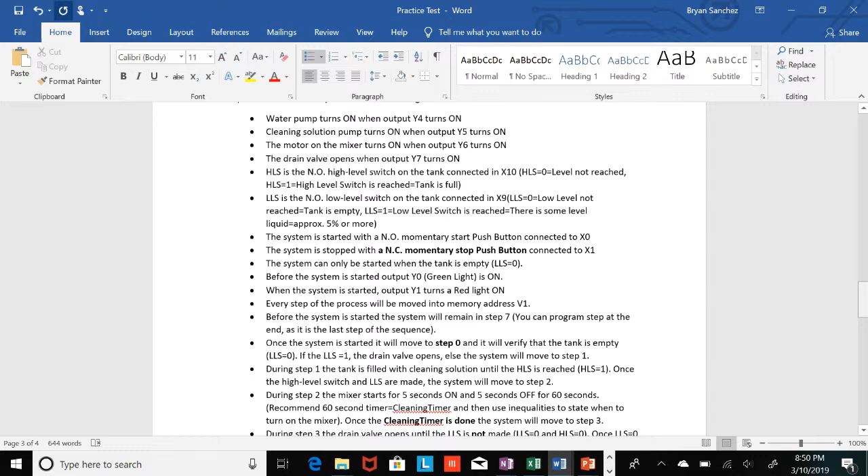And time on delay is the same thing, and making edits online. You definitely must see this one, so you don't take that long making this project. All right. So let's go over some of the specifications. Before that, we can even cover some of the details.

So we have a tank with a high level switch and a low level switch. When the low level switch is made, it means this float is floating and it's aligned with the switch itself. Right now, it's looking downwards, right? So it's throwing a zero. I made it normally open. So if it's looking downwards like this, it's not floating in water or on the solution. It's a zero. It means empty.

If it starts floating and it's aligned with the switch itself, then you have low level water. Same thing for the high level switch. If it's not floating, it's looking downwards, you have a zero. Once the water reaches a certain level, this little float starts floating, you're going to get a 1 because the switch is going to be aligned and the tank is full. All right.

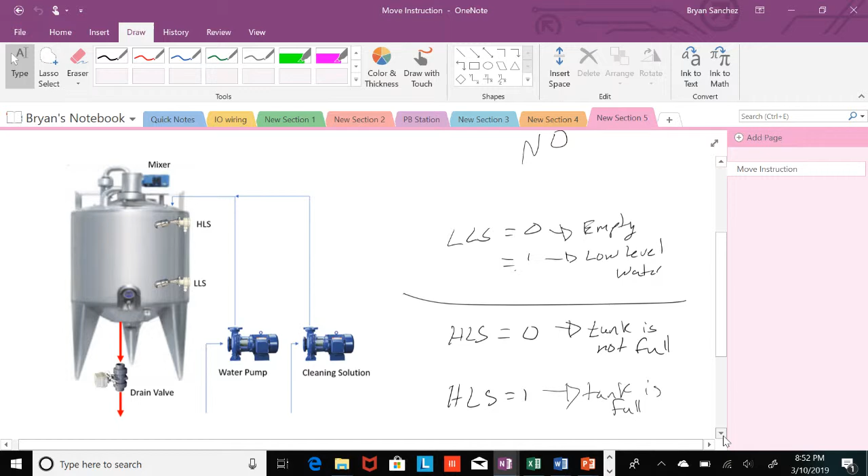You're also going to have a mixer, a motor for a mixer. It's going to turn on the mixer to clean the walls of the tank. Two pumps, one with a cleaning solution, one with the water, and a drain valve which drains the entire tank. All right. Let's go over some of the specifications now.

So the water pump will be wired and programmed to output Y4. The clean solution pump will be wired and programmed to output Y5. The motor for the mixer is going to be wired and programmed to Y6. The drain valve opens when output Y7 turns on, so it needs to be programmed and wired to Y7.

The high level switch is normally open. All right. And it's connected to X10. So when X10 is 0, the level has not been reached. When X10 is 1, the high level switch is reached, meaning the tank is full. So going back to our little drawing here, same thing I explained just a few seconds ago.

When the high level is reached, the float is going to be floating with the water. It's going to be aligned with the switch. Instead of looking downwards like it is right now, it's going to be aligned with the switch. It's going to throw a 1, meaning the tank is full. Okay.

So going back to this, then you have a low level switch, normally open, connected to X9. Meaning if the low level switch is 0, meaning X9 equals 0, the low level has not been reached. The tank is fully empty. Going back to our drawing. So this little switch is looking downwards, it's throwing a 0, meaning the tank is empty.

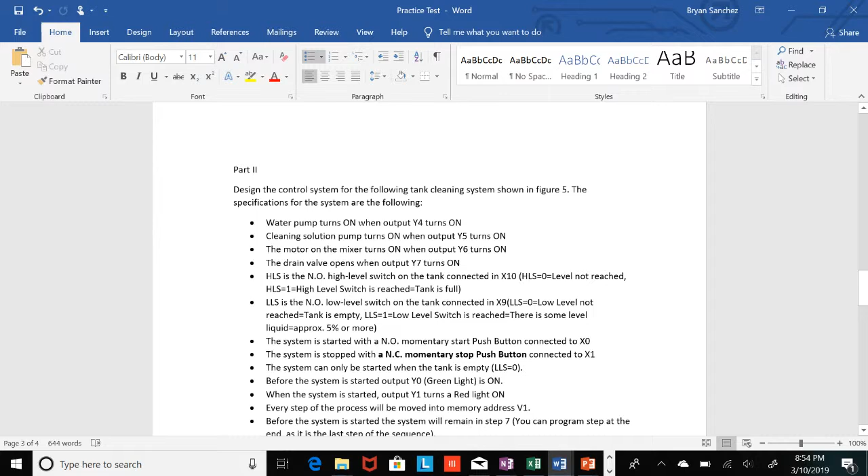The system is started with a normally open momentary start push button connected to X0. The system is stopped with a normally closed momentary stop push button connected to X1. The system can only be started when the tank is empty. If not, it's going to remain at step 0, and we're going to discuss that pretty soon.

Before the system is started, the output Y0, a green light, is on. This is before the system is started: Y0 will be on, meaning the green light. Once the system is started, the output Y1 turns on, a red light is on, meaning we're undergoing cleaning.

All right. Every step of the process will be moved into a memory location, V1 address. So we're going to use that V1 to see the steps that the system is going through.

Before the system is started, the system will remain in step 7. You can program this step at the end as it is the last step in the sequence. So I'm already telling you, program it at the end since it is the last step of the sequence.

Once the system is started, it will move to step 0. Note that step 0 is not an actual step, it's just a verification. That's why I call it step 0. It will verify that the tank is empty: low level switch equals 0. If the low level switch is 1, the drain valve... first of all, you have to understand what the low level switch equals 1 means.

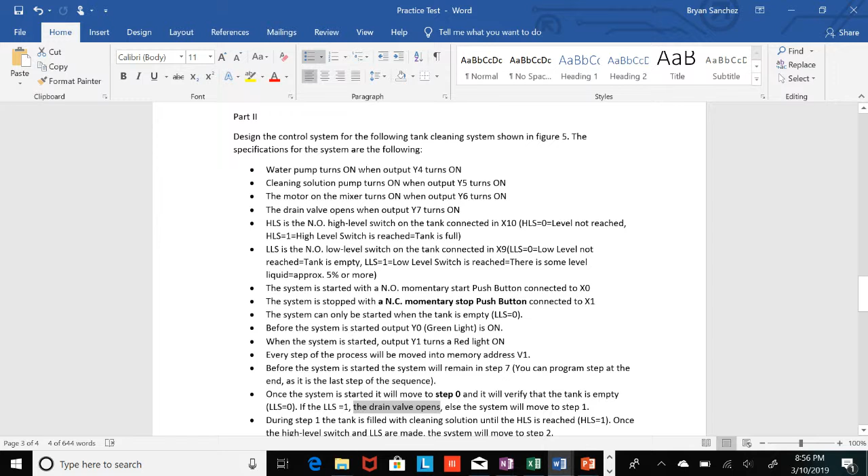So if you go back here to the low level switch, when the low level switch is 1, the low level switch is reached. There's some level of liquid in the tank, right? So since there's some level of liquid in the tank, the drain valve opens until the low level switch reaches 0. Else, we will move to step 1. So the system would say, "Hey, I'm empty already, so I'm moving to step 1."

I can add it here until the low level equals 0. Use the normally closed contact to evaluate this. All right. Actually, I'm not even going to code it. You can use whatever you want. The drain valve opens until the LLS=0 is there. So don't use it. Actually, you should use a normally open contact for evaluating that it's there.

You open the drain valve. Once this turns off, which means you have reached a low level switch of no level in the tank, then your drain valve closes. And I can show you that. I can put it right here. It's going to be very repetitive, I mean, copying the instructions. Once the low level switch...

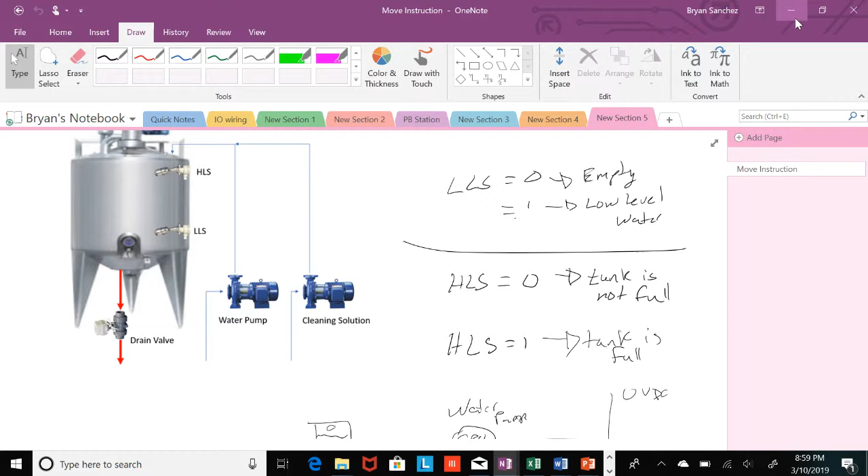During step 1, the tank is filled with the cleaning solution. So if you go to the drawing, just imagine: I'm in step 1, I start pumping cleaning solution. The tank starts filling, and you want to stop filling when? Just use common sense for this, right? Once your high level switch is made, I want to stop my cleaning solution pump from pumping, right? So you want to turn it off. So filling with the cleaning solution until the high level switch is reached.

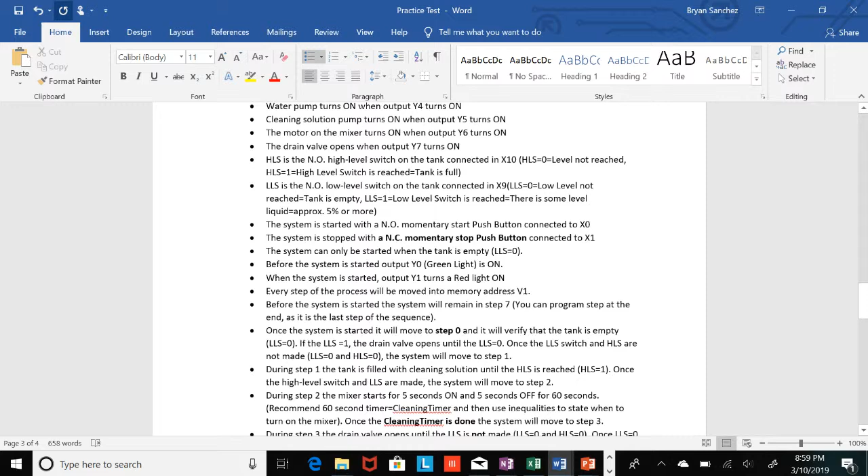Once the high level switch and the low level switch are made, the system will move automatically to step 2. During step 2, the mixer runs 5 seconds on, 5 seconds off for 60 seconds. We're going to call this timer, which is going to be a 60-second timer, a cleaning timer. Then use inequalities to state when to turn on the mixer. Once the cleaning timer is done, the system will move to step 3.

During step 3, the drain valve opens until the low level switch is not made. Okay? Once the low level switch equals 0 and the high level switch... look, this is different, right? So this is opening the valve. This is the condition to open the valve. It says the drain valve opens until the low level switch is not made. And I'm going to show you this on the program.

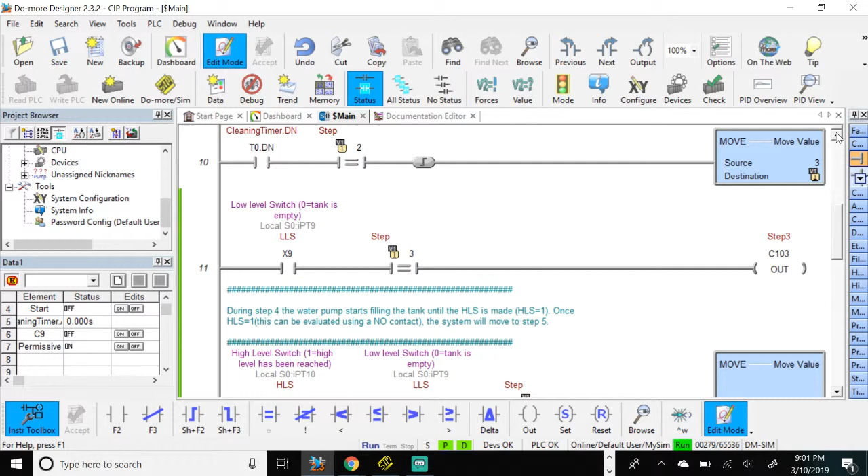Okay. Which step is this? Step 3. So I'm in step 3, right? And move 3 to location V1. And this is the pointer right here. When V1 equals 3, you could program this just like that. V1 equals 3, all right? And my low level switch is 1. I'm going to execute step 3.

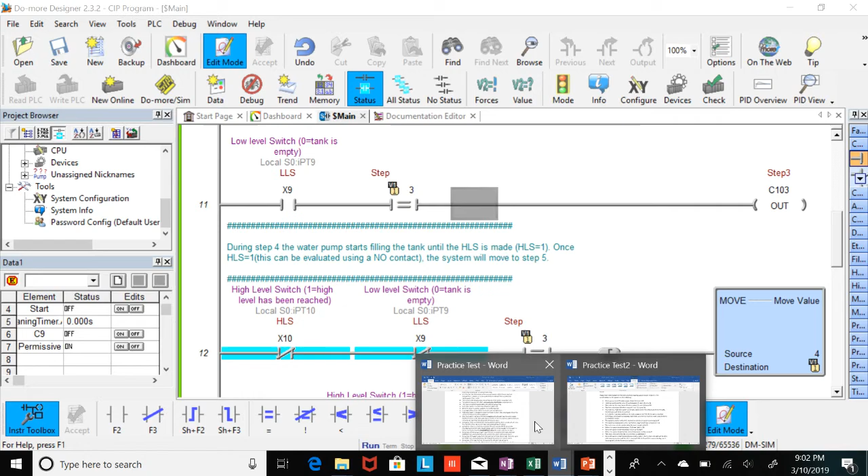And what is step 3? If I go down further, step 3, drain valves. So the drain valve is open in step 0, step 3, and step 6. So look at this. Look what it says here and compare it with the specifications. In fact, I'm going to copy the whole thing.

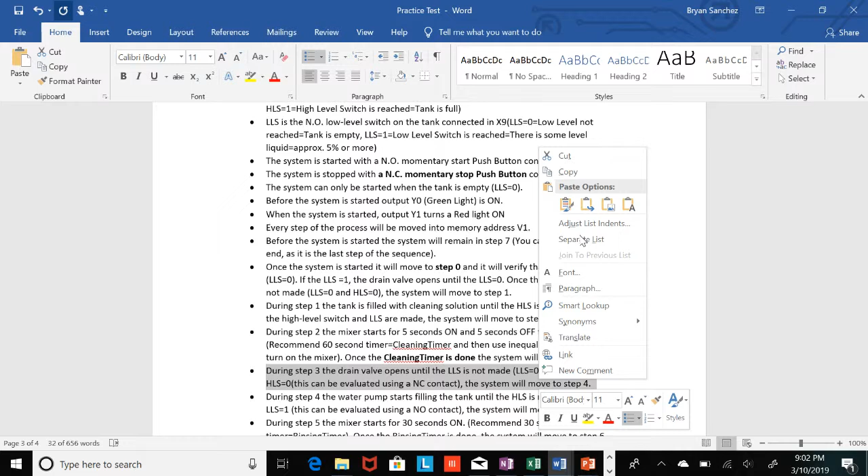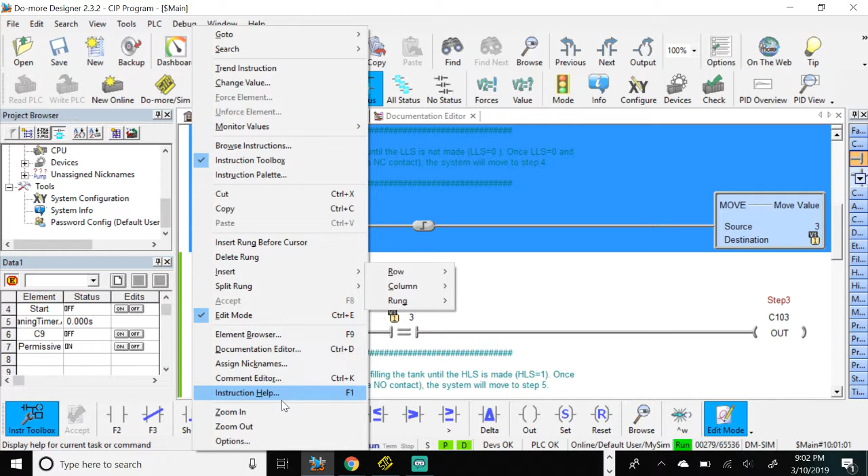Step 4. So in order to see these comments like I put, you can click on the rung that you want to put the comment on. And then you're going to insert, actually not insert, comment editor. I want to add it right here.

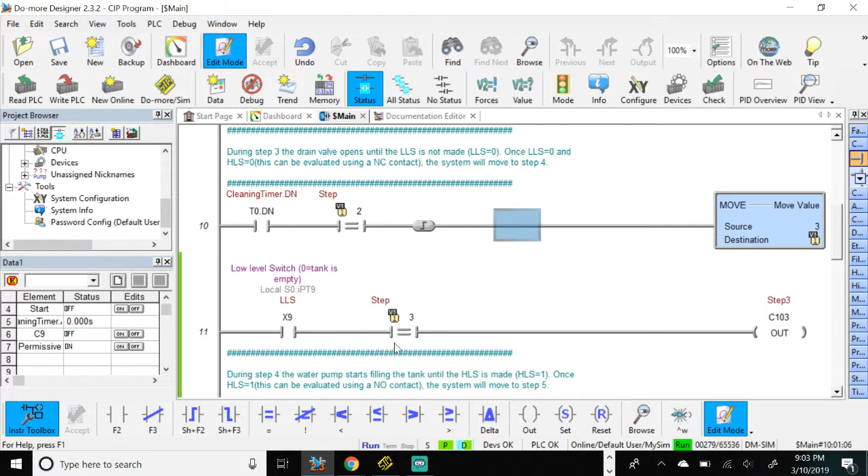I said okay. During step 3, so basically this opens the drain valve, right? During step 3, the drain valve opens until the low level switch is not made. Low level switch equals 0. So this opens the drain valve. So while this is 1, it's going to open, all right? Once this becomes 0, during step 3, it's going to put a 0 to the drain valve, shutting off the drain valve, which says until the low level switch is not made equals 0, right?

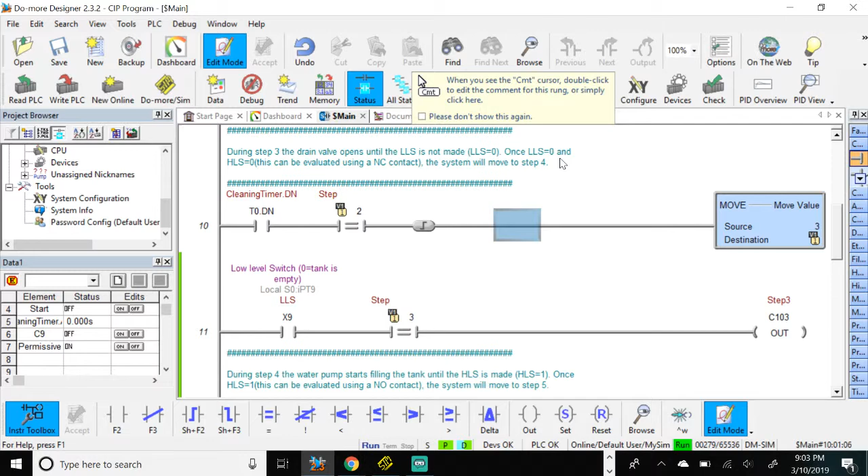So how can I evaluate that? Normally open, while it's 1, it's going to open the drain valve. When it goes back to 0, then I stop draining, right? Then it says once the low level switch equals 0 and the high level switch equals 0, the system can move to step 4. Then this part of the sentence is not here. It's going to be right here. So once the high level switch and the low level switch are not made during step 3, I'm going to use this one shot that goes from off to on.

When this whole rung goes from false to true, at that instant, meaning from off to on, I'm going to move a 4 into V1, which right now you have a 1, but initially you had a 3. And this is during step 3 only, right? You want to make sure this is on each and every step. What step were you in and what step you're going to move to. So you're going to add this little instruction right here.

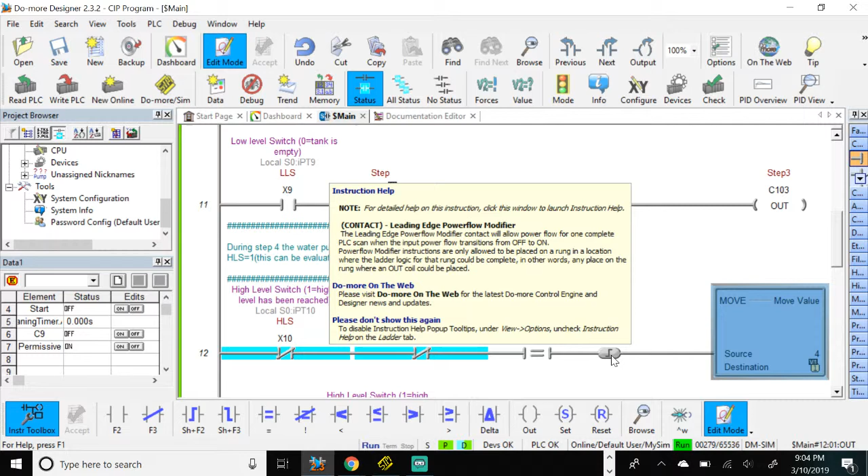So if I take this off and I move a 4, this is going to be always true. If you watched the previous video, you know that this only turns on for one scan time. That means milliseconds. We already discussed this part, right? So it's going to pulse, I'm going to throw a little pulse for a millisecond range where it's going to put a 4 into V1. If it wasn't for this, you're going to have a 4 there permanently.

And then when you go to the next step, when this switch and this switch is made, and I'm taking this off too, I'm going to move a 5. But you already have a 4 over there. So is it 4 or is it 5? This is why you need to add this little instruction here. You need to add this. It will not work if you don't add this instruction here.

Another thing you can do is, instead of this, you can put one-shot contacts on here. I do not recommend that right now, because if the level starts bouncing around on the tank, then it might cause some issues. I would use this. So when this whole rung goes from false to true, obviously your high level is going to go first, right? Then you keep draining, you keep draining. Then you reach a very low level. Then this one's going to go false, right? Since it's normally closed, it becomes true.

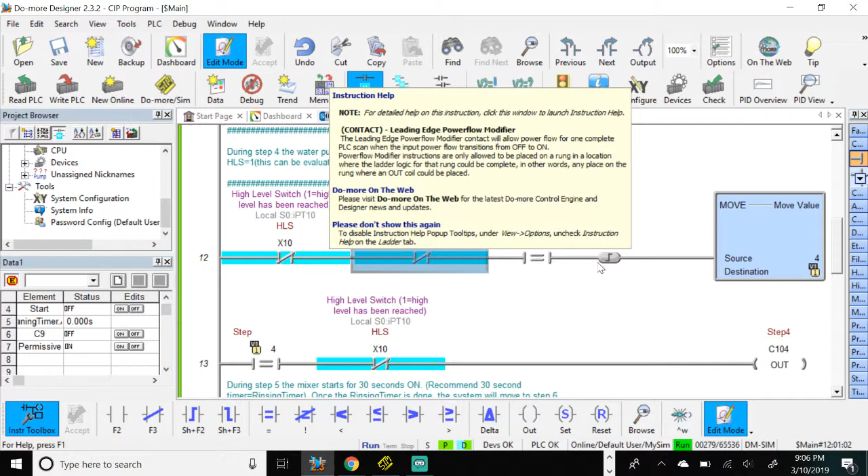So you say during step 3, now I know that my tank is drained. So it goes from false to true, throws a little pulse, it moves the 4 into V1. Now, it's not constantly true. It's not moving the 4 every scan time. It just moves it for one scan time, moves a 4 to V1. So now you got a 4 here.

Now when this happens, this becomes true. All right. Now I'm no longer moving a 4. I already have a 4 in there. So now it's gonna do the same thing. It's gonna move a 5 for one scan time. And with this instruction, once you move it, it's there permanently until you move something else to it. So it moves a 5 to V1.

You can experiment with this on your own as well. You can try it on your own. And there's a video on it as well. All right. So you want to put this instruction before it. Okay.

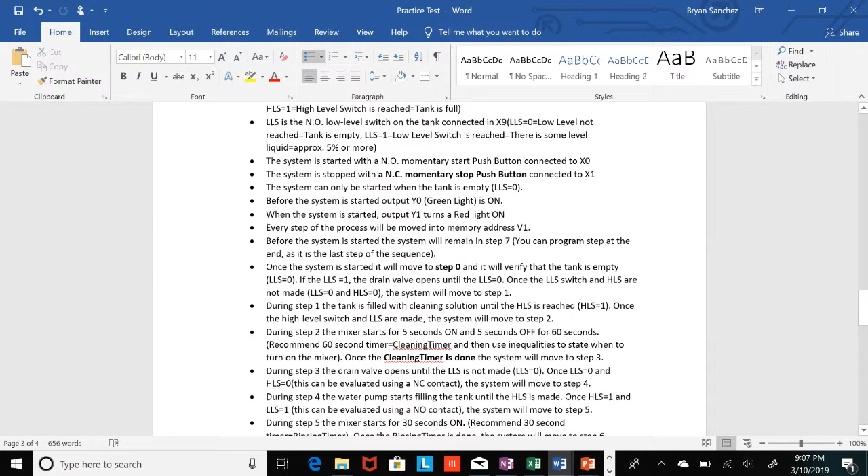During step 4, the water pump starts filling the tank until the high level switch is made. Once the high level switch equals 1 and the low level switch equals 1, meaning the tank is full, the system will move to step 5. So let's go into our program. So you were in step 4, right?

So in step 4, it tells you, during step 4, the water pump starts filling the tank until the high level switch is made. So I start filling the tank. Once my high level switch is made, I no longer want to fill the tank, right? So when it's made, I want it to turn off. So high level switch becomes 1, and this is saying, hey, no, you're already full, so I'm going to cut power to it, right?

Meaning the high level switch has been made. I'm evaluating here that when my high level switch is made, I don't want step 4 to keep filling up my tank. All right. During step 5, the mixer starts for 30 seconds on. And we're going to call that the rinsing timer. Once the rinsing timer is done, the system will move to step 6.

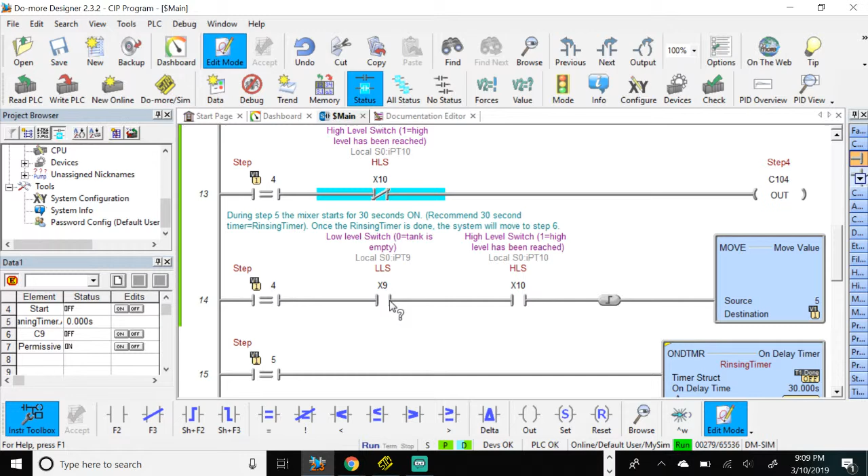So when I'm in step 4, and I already know that I am completely full, meaning my low level switch and my high level switch are true, I'm going to move a 5 to V1. And then during step 5, I start the 30-second timer, right? So I'm in step 5, 30-second timer. All right. Timer timing. It starts mixing my tank for 30 seconds.

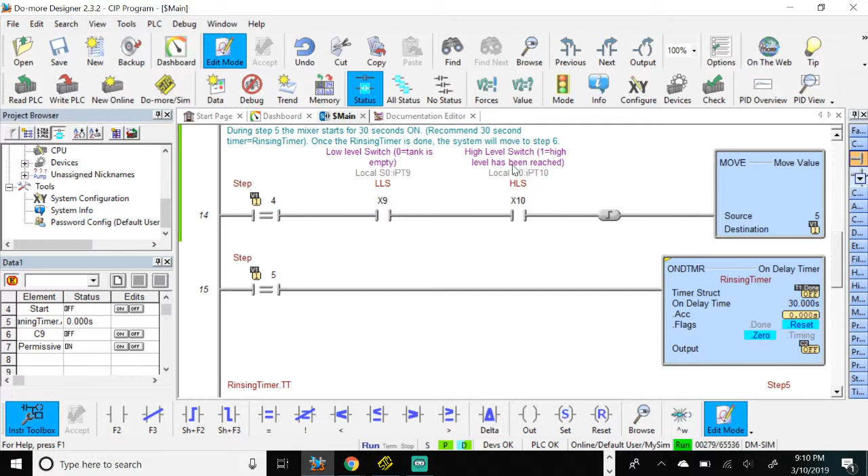Look what it says here now. Once the rinsing timer is done, the system will move to step 6. Once my rinsing timer is done, and I'm in step 5, put always this instruction right in front of my move, I'm going to move to step 6. Now I'm going to be in step 6. And what does step 6 say? During step 6, the drain valve opens until low level switch is not made.

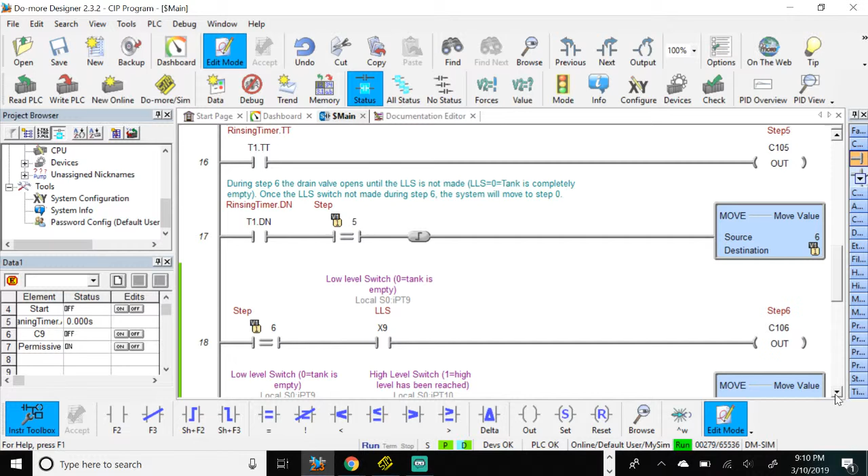So, step 6, low level switch. I'm going to start opening the drain valve, draining the tank. All right, draining the tank. Now, once my low level switch is no longer made, I'm no longer going to have a 1 here, right? Let's put this one in perspective just so you see it.

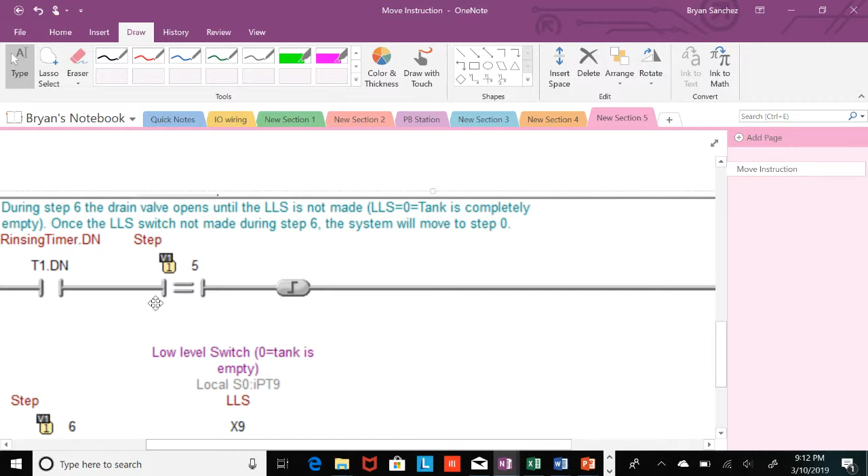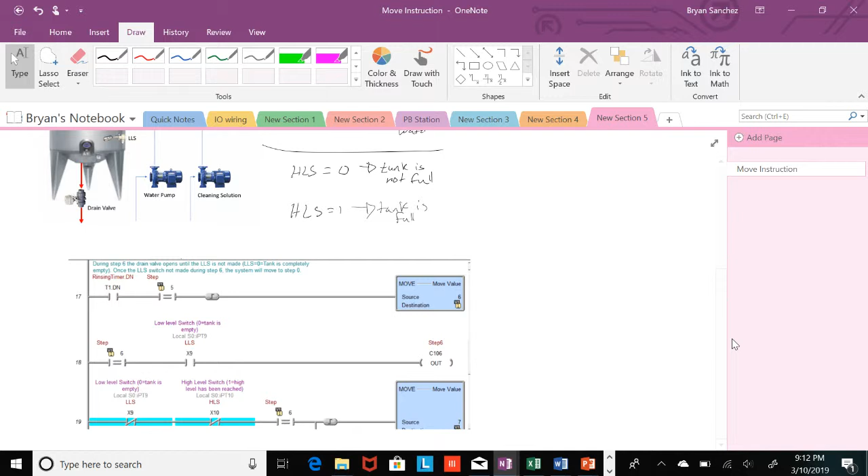So, once your mixing or your rinsing timer is done, in step 5 you move to step 6. In step 6, it says you're gonna open the drain valve. There's a drain valve in step 6, and I'm gonna show that to you pretty soon. This is basically a permissive for the drain valve. I call it step 6. All right, and so in step 6, you're gonna open the drain valve.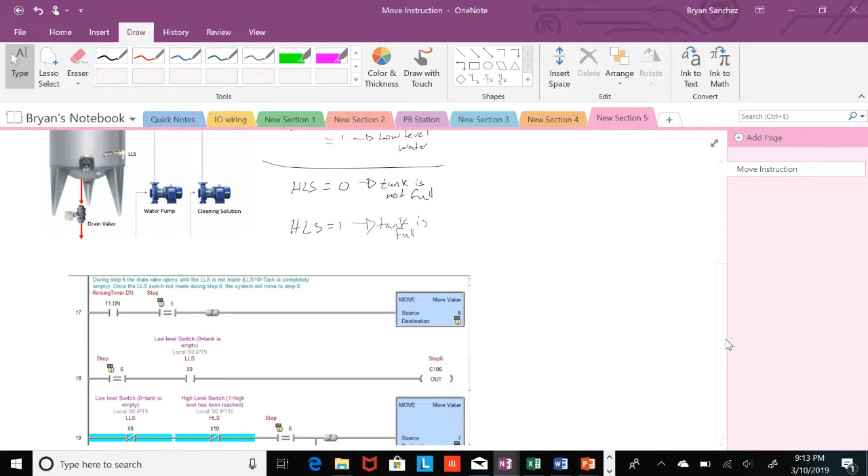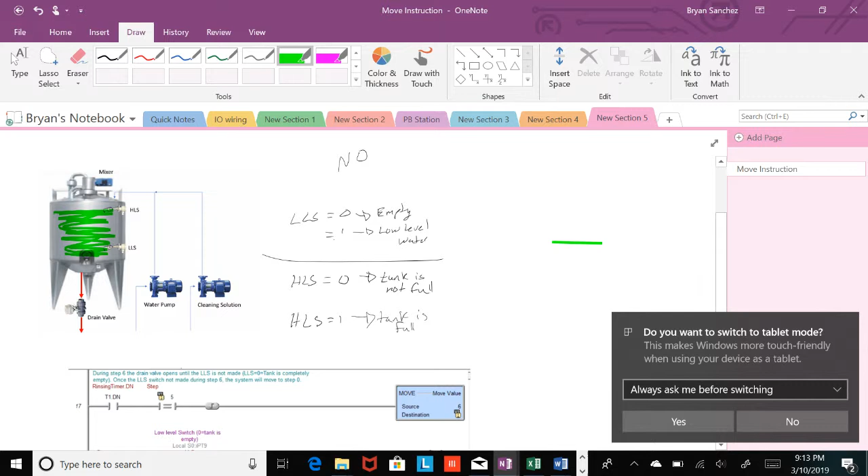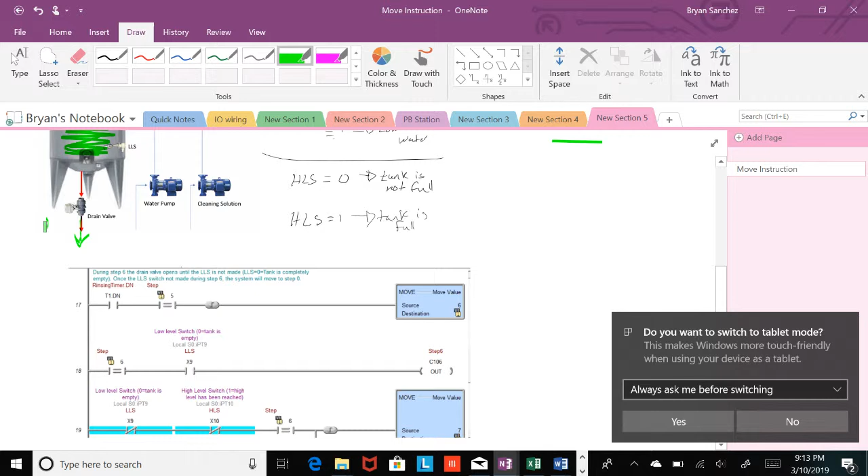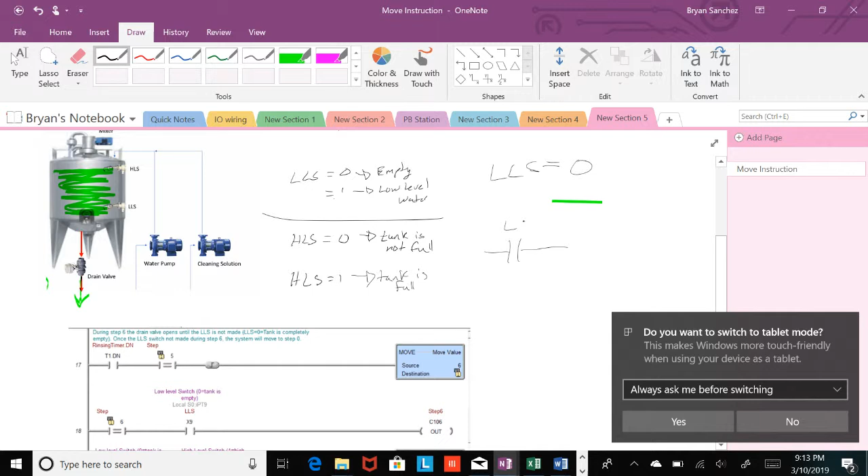So you have your water level full. So basically, if my water level is full, let's use this marker right here. You have water level here. And you start draining water. Your valve has a 1 there. So you're telling it drain until low level switch equals 0, right? So if low level switch equals 1, it means there's water in there, right? There's 1.

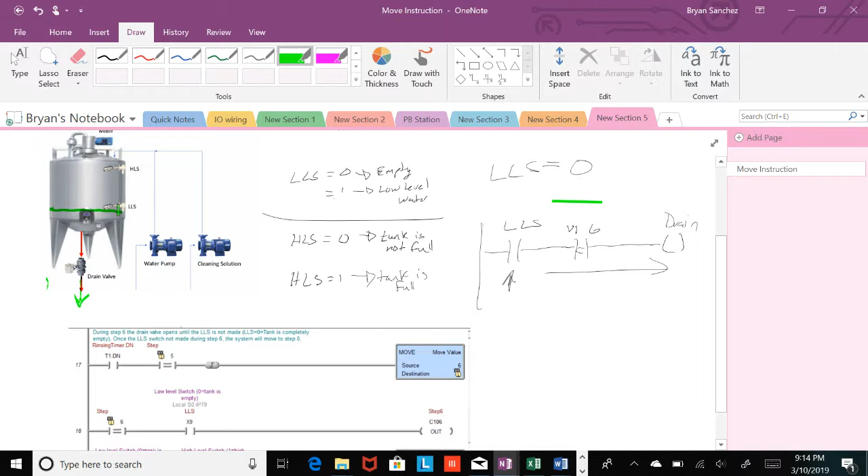So once the tank goes empty, let's say initially it's going to go around here, and you're already empty, your level switch is going to turn to 0, right? So if I have a 0 here, this instruction is no longer true, even though I'm in step 6. So I'm going to stop draining. So my drain valve is going to turn into a 0. All right? My drain valve is going to turn to a 0.

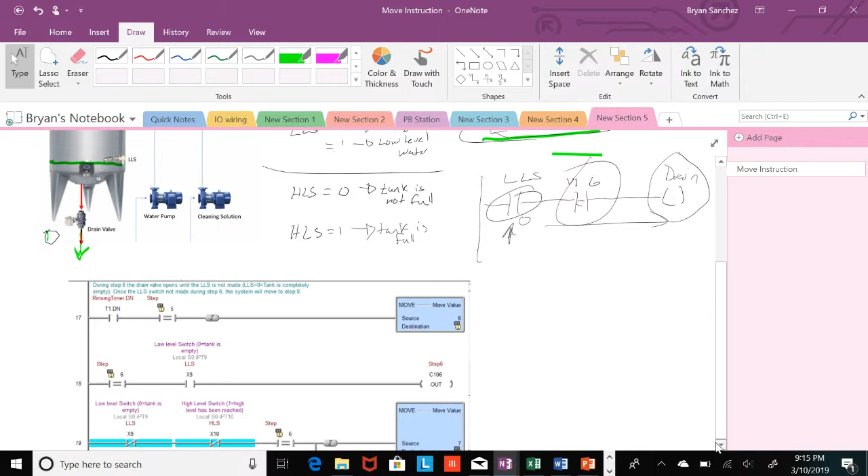Okay? Then it says, once the low level switch is not made during step 6, the system will move back to step 0. I added the high level switch as well. I'm adding it every time I move through steps because it's easier to simulate and it's a verification. Hey, if I'm going to say the tank is empty, both switches should be off.

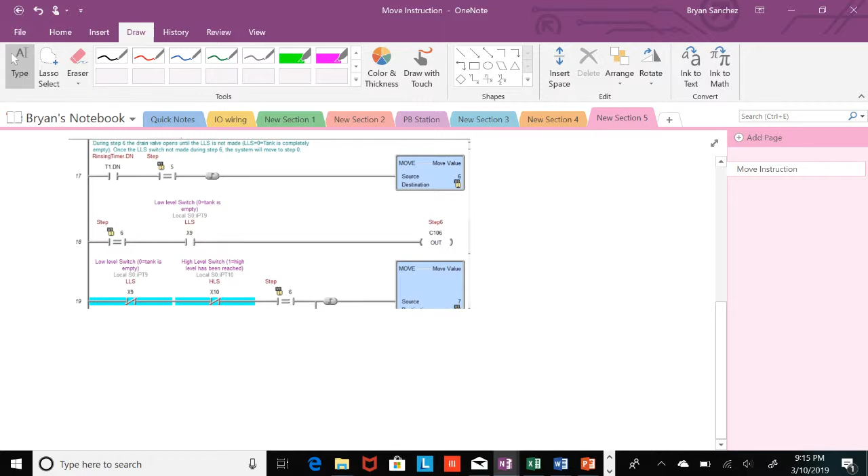So, meaning, in this case, I am draining because my switch is on. Until my switch is off, I'm not going to stop draining. And this is what it says there. So look, until my switch is off, I'm going to keep draining. If my switch is on, I continue draining because there's water in the tank.

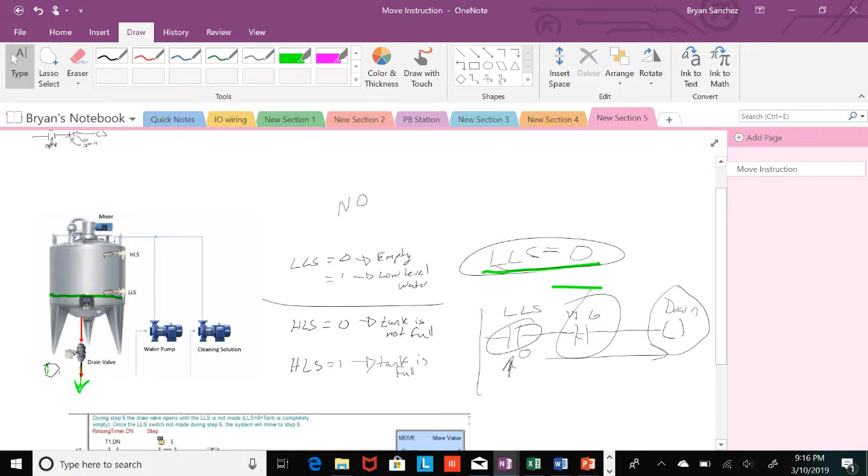Now, to move to step 7, I'm saying, well, am I empty on the low level side? All right. It will not make sense if I say, hey, I'm empty here and I'm not empty on the high level switch. So in order to be empty, unless water floats on the tank, I should be off here and off here on both of them. Meaning, what does off mean? Means I'm off.

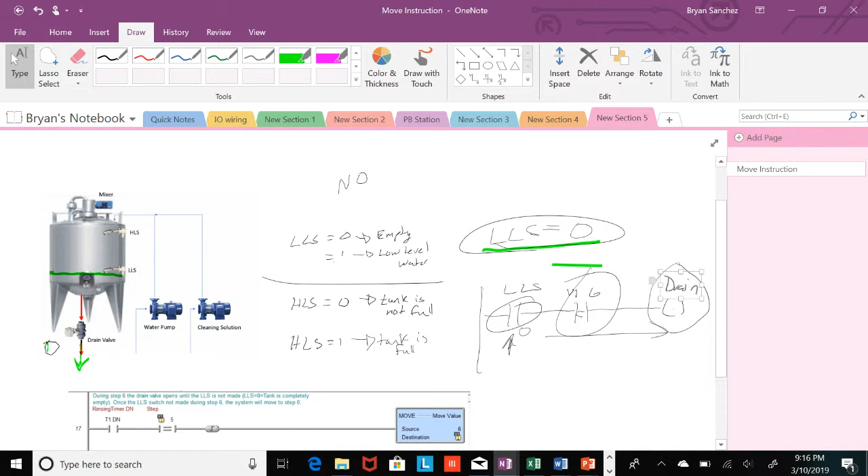The float switch is no longer floating in water, and I doubt it floats on air. So I have a 0 there, a 0 here. While in step 6, I'm always going to add this little one shot that's saying, hey, when this is true, from off to on, during one scan time I'm going to move, I'm going to pulse a 7 to V1. Just put it there, bam. That's it. I'm no longer going to execute this instruction anymore, unless I go back through the cycles, end up in step 6 again, and this becomes false, and then it becomes true again. All right.

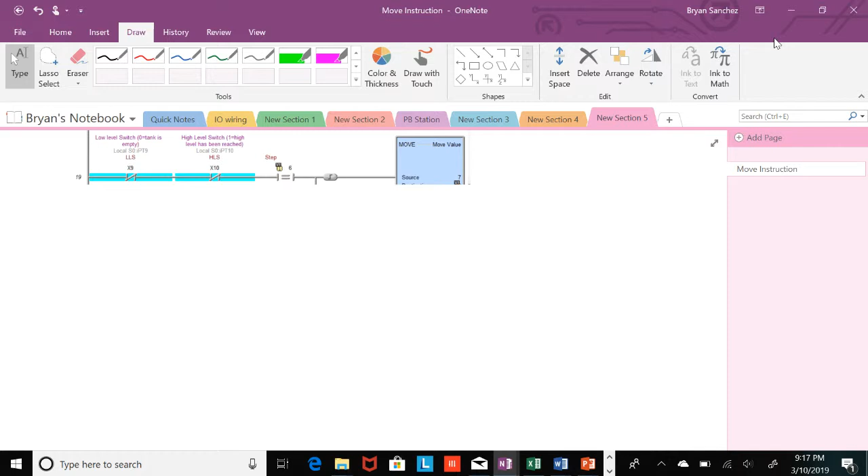I also added, so the specifications, if I go back to my specifications, during step 7, the permissive to start is reset back to 0, meaning your Y0 green light will turn on and wait for the operator to initiate the next cleaning sequence. Basically, it's saying, hey, I'm idle. You guys initiate an additional cleaning sequence.

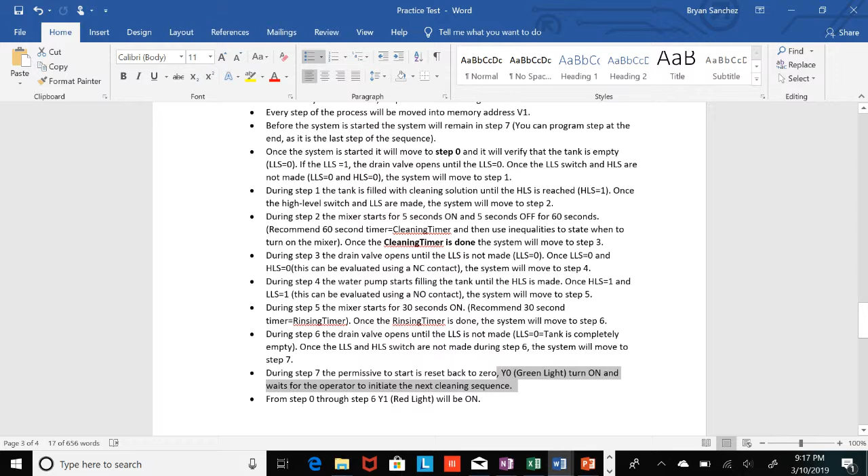So, let's say I stop the system in the middle of a run. All right. If I stop the system, your permissive is not going to be true. It's going to move a 7 to V1. All right. And in V1, in step 7, once I start it again, it's going to go back to step 0. I'm sorry.

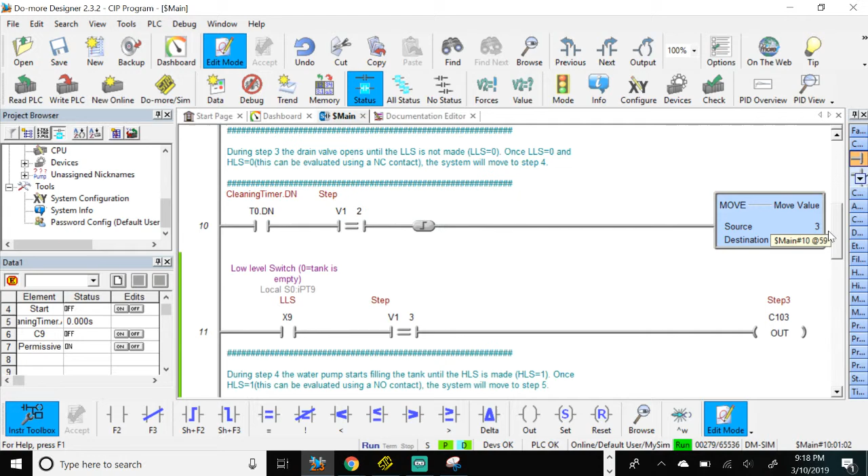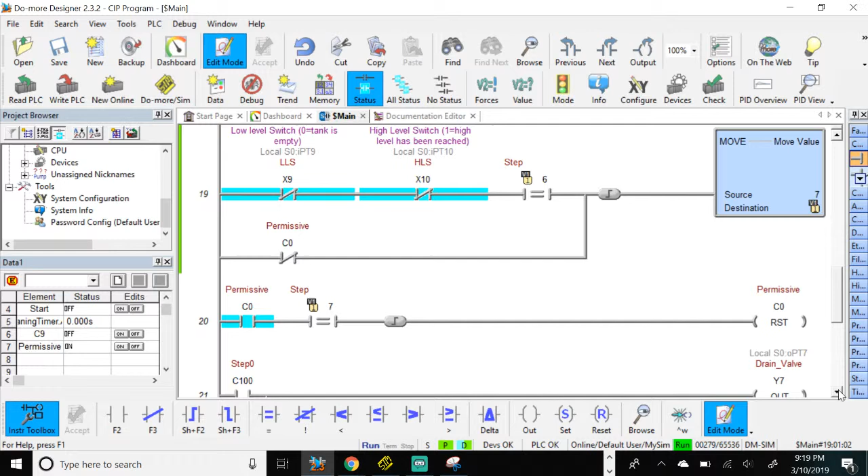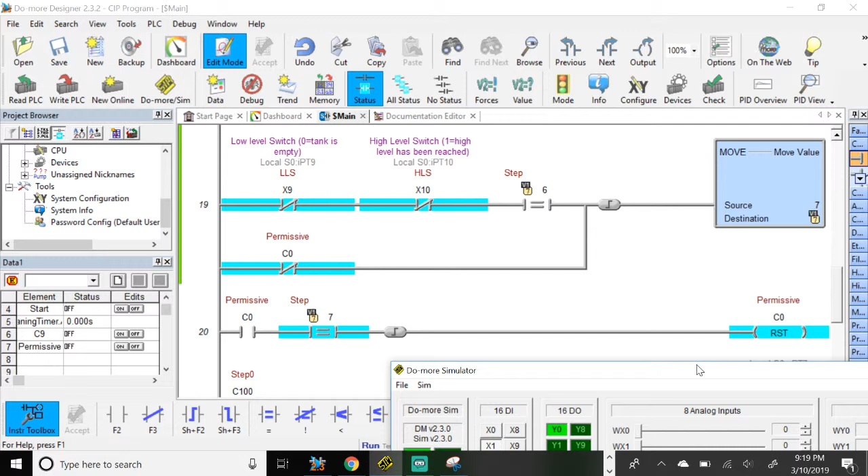Once in step 7, it's going to reset my conditions. If I'm not mistaken, that should be true. Yeah, if I'm in step 7 and I'm permissive, I'm going to reset my C0, my permissive, meaning I'm going to shut off and be ready for my next cleaning sequence. But I'm still in step 7. Okay? Let me verify something. So you notice I reset. Now my permissive is reset. I'm in step 7. Okay?

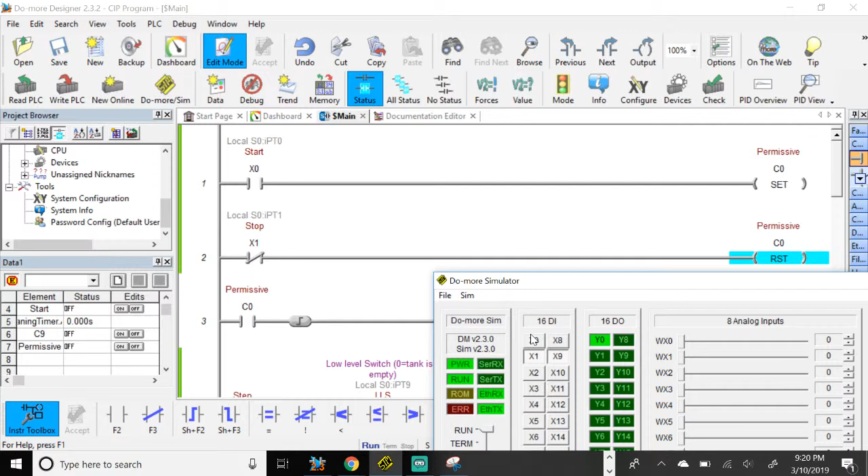So let's say my low level switch, which is X9, is made. What does that mean? That means this is normally open, there is some water in the tank. And I start the system, right? The X1 is my normally closed stop. So if I start it, non-permissive again, took me back to step 0. Okay? Now it's trying to drain.

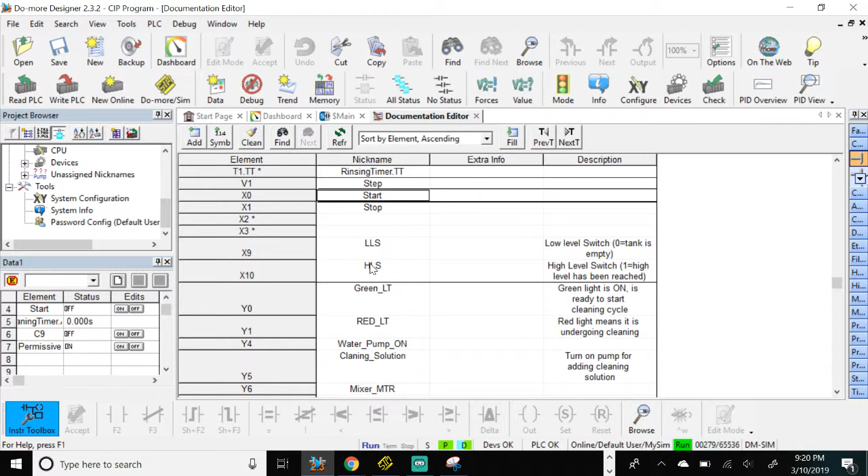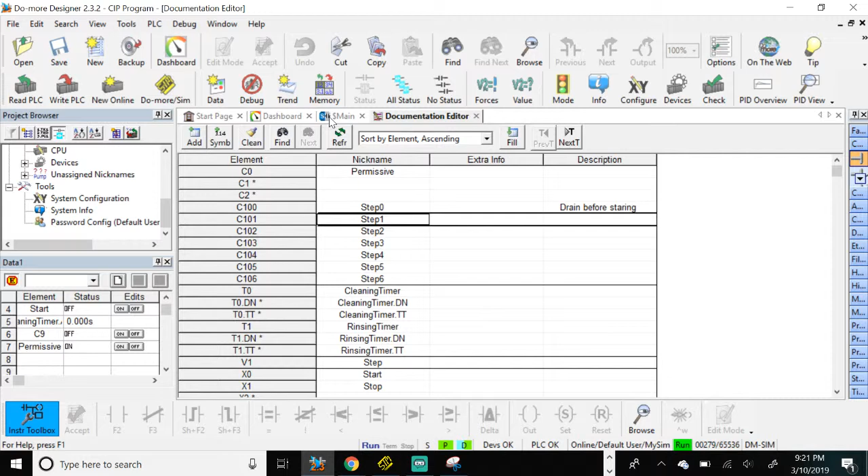I can add it right here if you want. So you can add it. You can go to documentation editor. Was it C100? Drain. This is basically your drain before starting. All right. So I'm in step 0, right? So I'm draining. If you go down here where I put all my actual outputs, drain valve. Drain before starting, step 0.

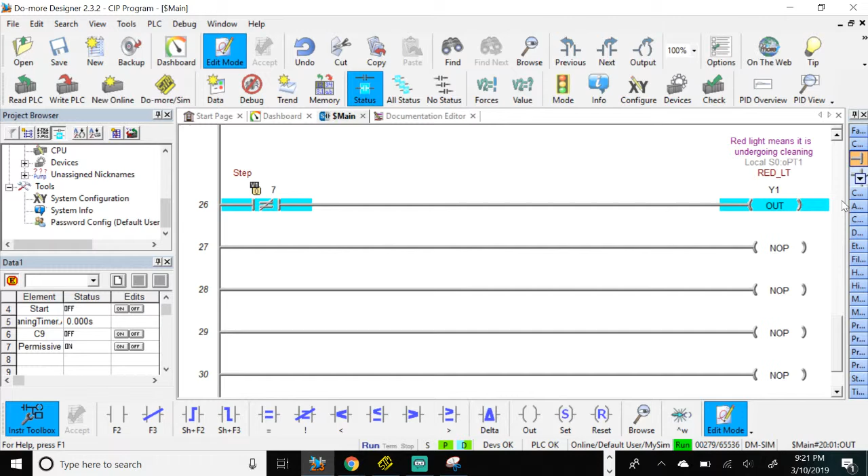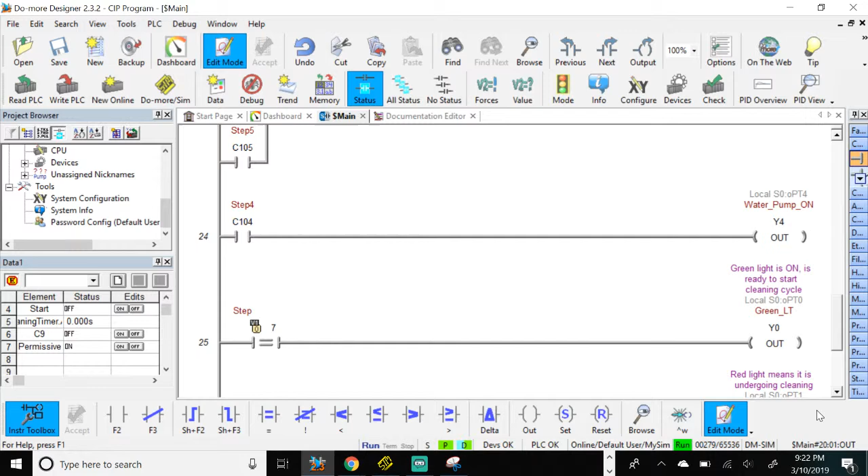Notice that I put my outputs at the end of my program, all the actual outputs, all my Y's. And then use the C's for each step to turn on the output. So step 3 is going to turn on the drain valve. Step 6 also turns on the drain valve. The clean solution pump is only turned on during step 1. Mixer motor is only turned on during step 2 and step 5. Water pump, it's only turned on in step 4. Then green light, that one I will leave to you guys. You guys can figure that one out.

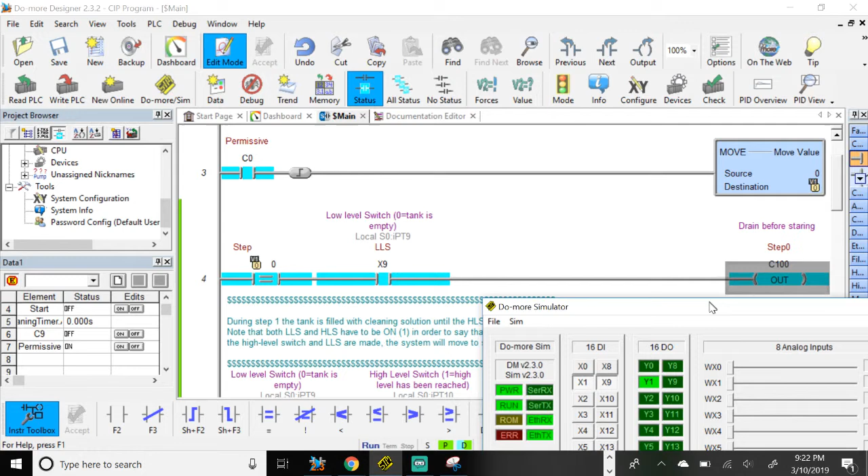All right, so it says here low level switch, I'm draining my tank. So once my low level switch is no longer made, meaning the tank is empty, I have drained my tank, what's going to happen? So C100 ends up being nothing, and I move to step 1. Now I'm in step 1. Okay. That is step 0. Kind of move a little bit fast. There you go. So this is step 1. So I move to step 1 when my tank is fully empty, meaning low level switch is not on, high level switch not on. I was in step 0, and I am permissive, meaning I started the system.

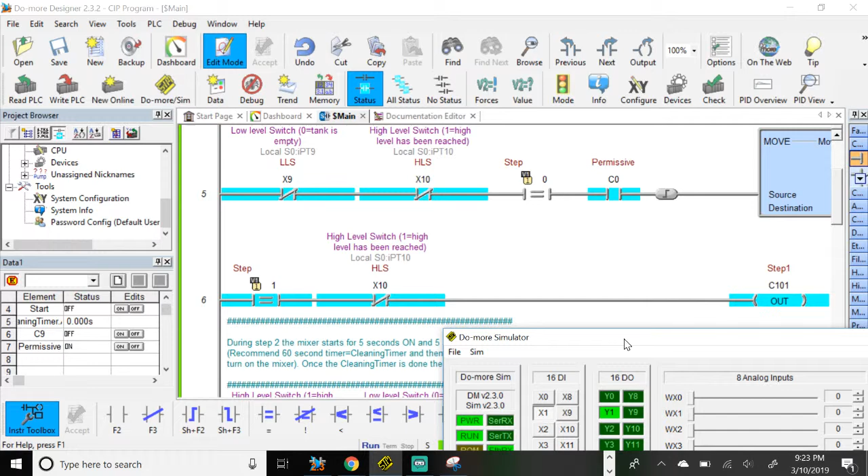So in step 1, I'm going to fill my tank until high level switch is made. So in order to carry out a good simulation, if I'm filling my tank with cleaning solution, and if you look here, step 1, cleaning solution, go down to the bottom, you're going to see the actual output that's being turned on. Just like our permissives to start, in this case, it's just a step. Use the same concept, right? C1, C101, step 1, cleaning solution pump. That's the actual output turning on the pump.

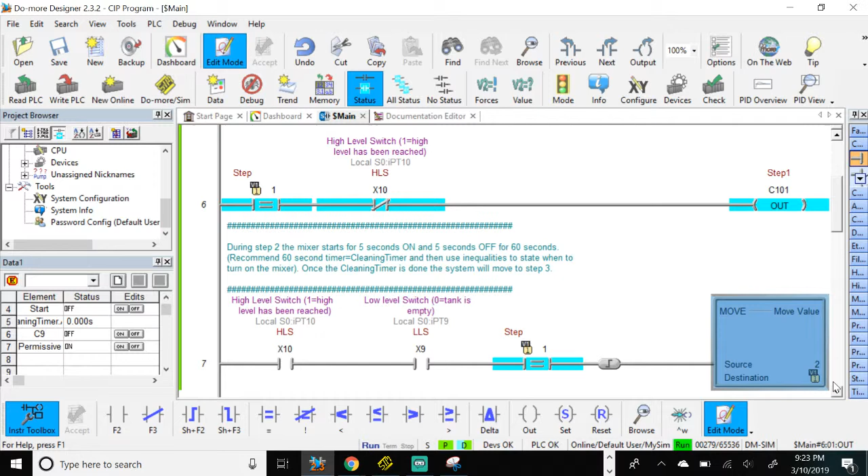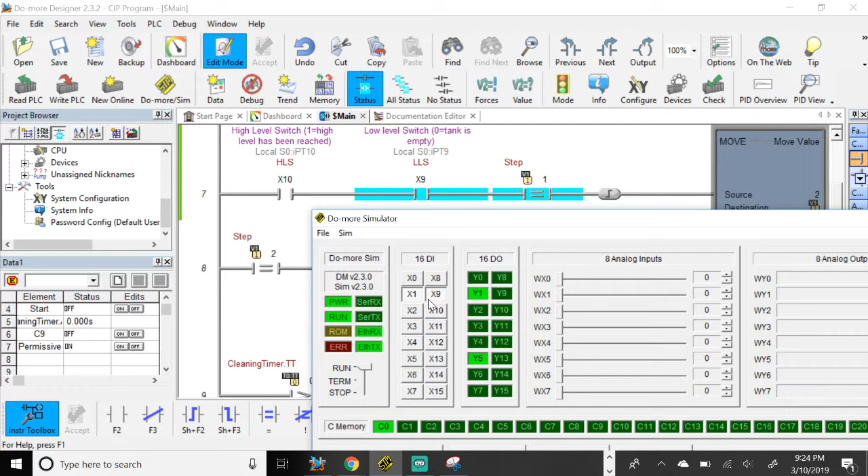All right, so it turns on, and if you imagine your tank being filled, first your low level switch is going to be made, right? And if I move this a little bit down to the bottom, your low level switch is going to be made, keeps filling up, keeps filling up. Then your high level switch is going to be made, and look what's going to happen here. Bam! You move a 2 to V1. Now you're in step 2. Timer started.

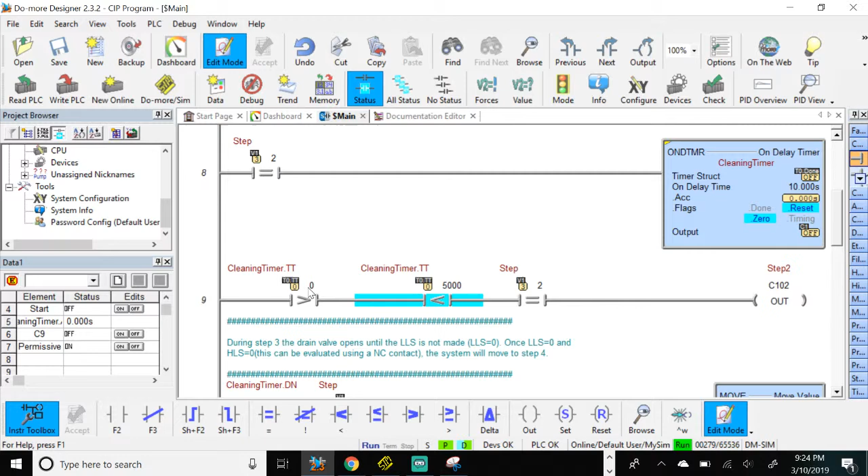Notice that I put 10 seconds here. There's going to be 60 seconds. This is your cleaning timer. You're going to use inequalities here to turn on your motor during step 102, or actually step 2. Once you're done, it's going to move to step 3, which you already did. Now you're in step 3.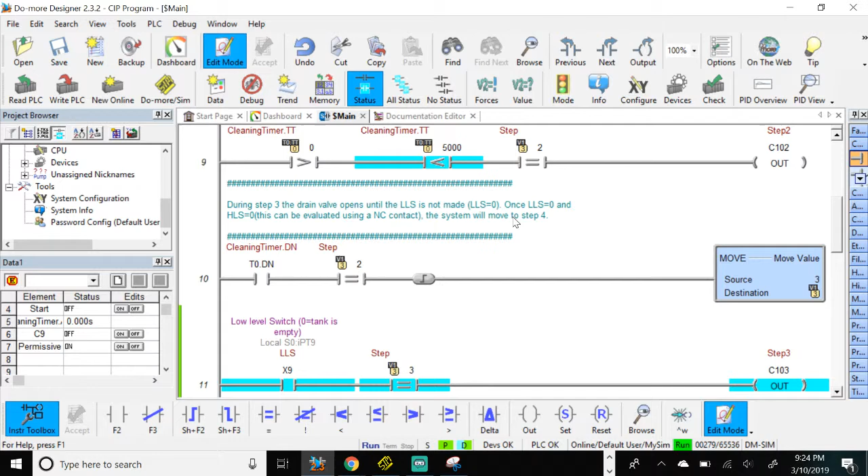Meaning you're going to drain the tank. It says it right here. Once the low level switch equals 0 and high level switch is 0, the system will move to step 4. So in your step 3, V1 equals step 3, you're going to move a 4 from the source to the destination every time this rung becomes true. And it's going to be true for a pulse of milliseconds. Really quick, it's going to be true and then come back to false.

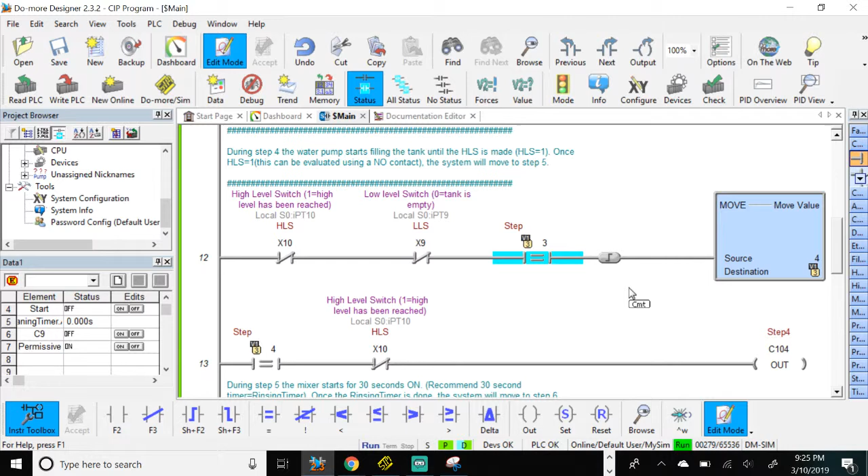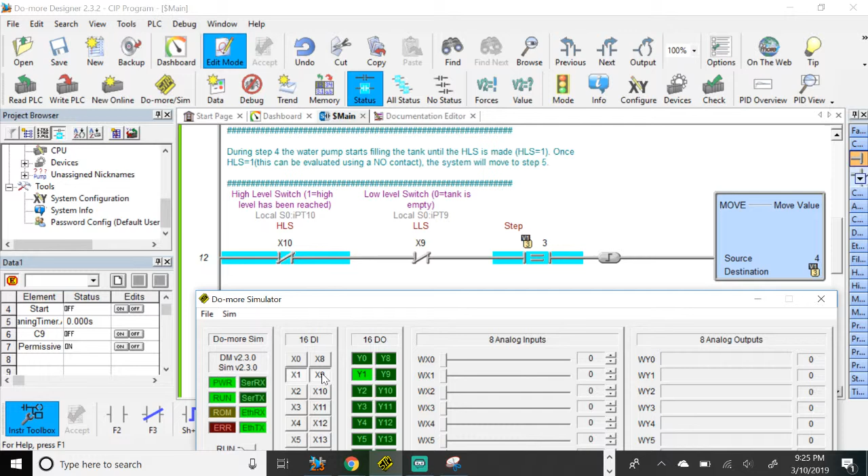I'll go here. So first, if you're draining your tank, obviously your high level switch is going to go off first. You see, I turned off my high level switch because it's normally open. Notice my stop button, which is normally closed, is still on. This one's normally open. Then my low level switch is going to be off. Bam, it's going to move to step 4. Now you're in step 4.

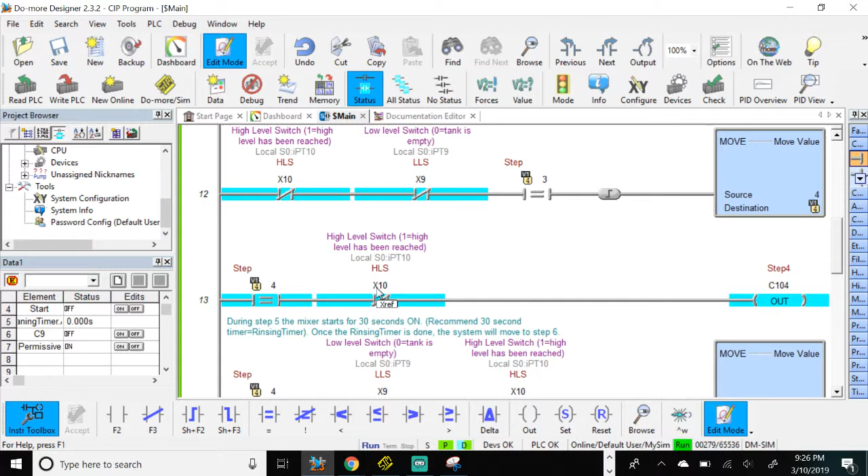When you're in step 4, what are you going to do? So this is right here. During step 4, the water pump starts filling the tank until high level switch is made. So high level switch is not made, right? So if you go back to your simulation, it's only logical that your low level switch is going to be made first. Imagine yourself filling up the tank, right? Your low level switch is going to be made. Then your high level switch is going to be made. Look what's going to happen.

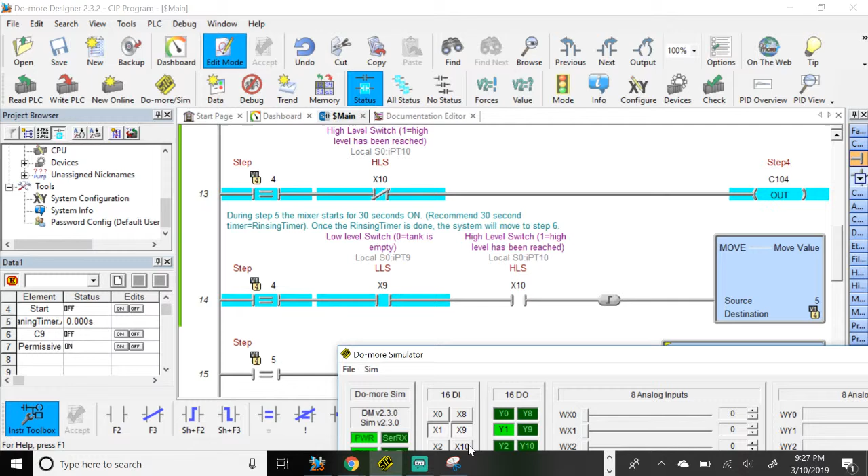Just so you see it. You're going to be made at step 5, and you're going to turn off step 4. Let's turn on here. Watch this one and this one and this one. High level switch, which is going to turn on right here. I turn it on, meaning it's full. It's full. So I'm filling up my tank with water to rinse it, right? So, bam, move to step 5.

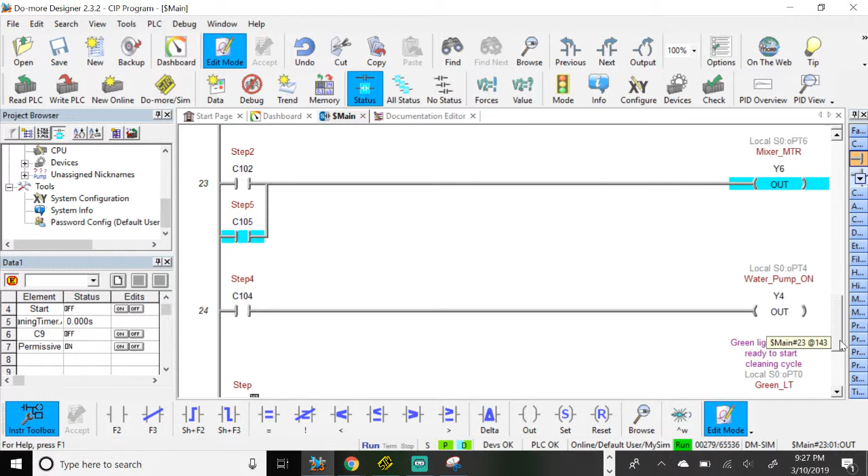Now I'm starting my rinsing timer. My rinsing timer is going to turn on the mixer motor during step 5, during timer timing, step 5. If I go real quick, step 5, mixer motor turns on. All right. So during timer timing, I'm going to mix. When I'm done, I'm going to move to step 6. Now what am I going to do? I'm going to drain again.

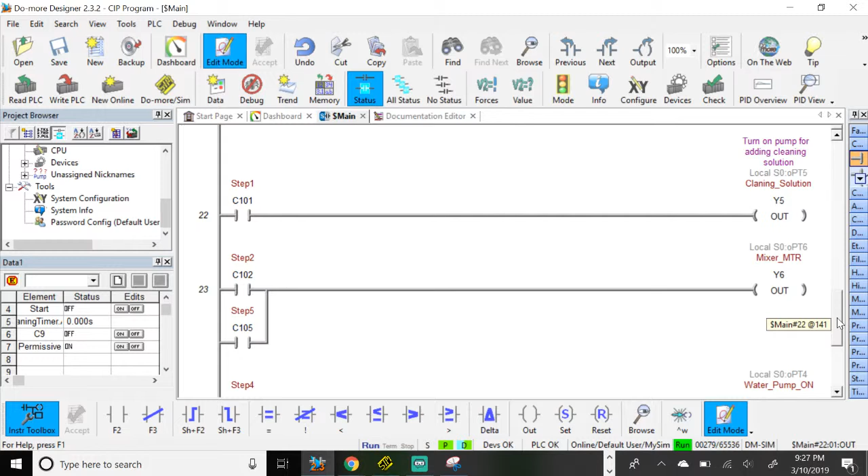We go to 106. Step 106 on the output side. 105. Drain valve, step 6. Bam, you're draining. So you're going to drain until your tank is empty. So if your tank is empty, first your high level switch is going to go off. Then your low level switch is going to go off. So you move to step 7.

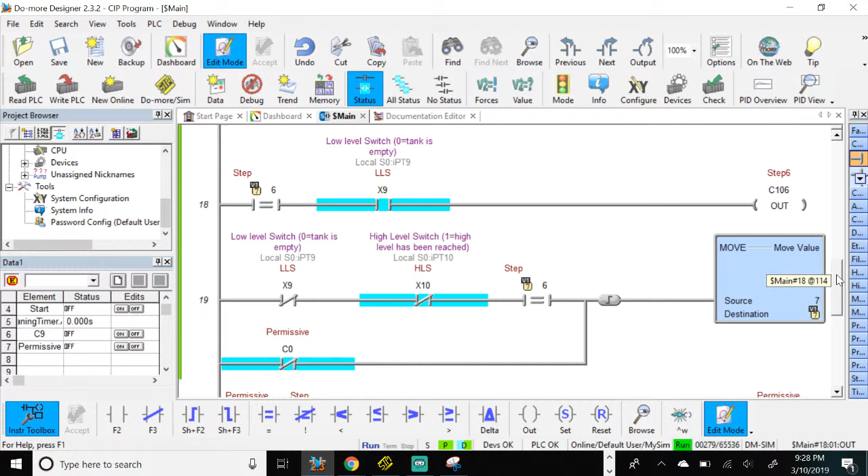So what I did is I put all these permissives in every step and then put my actual outputs at the end of the program and just OR the steps that turn on the output. This way I don't repeat this output 3 times on every rung that has step 100, 103, 106, since the output coils cannot be repeated. Notice that I did repeat the reset coil. That one you can. In this case, I repeated it and I added this one shot. So every time this happens, I am resetting back to 0.

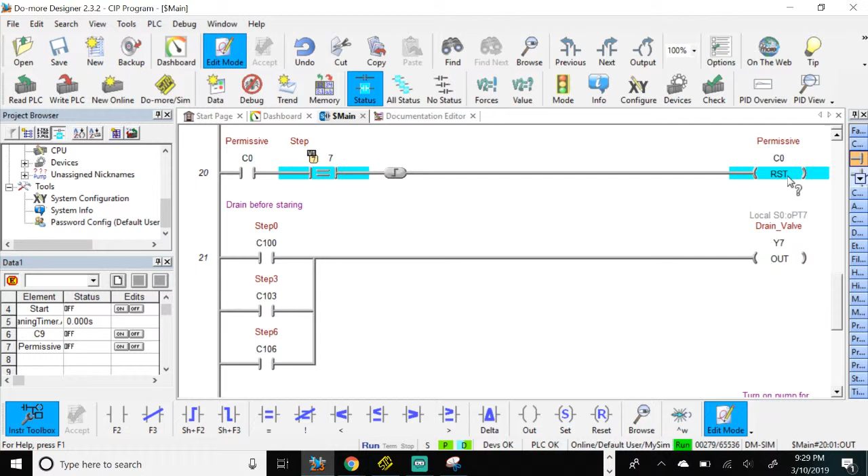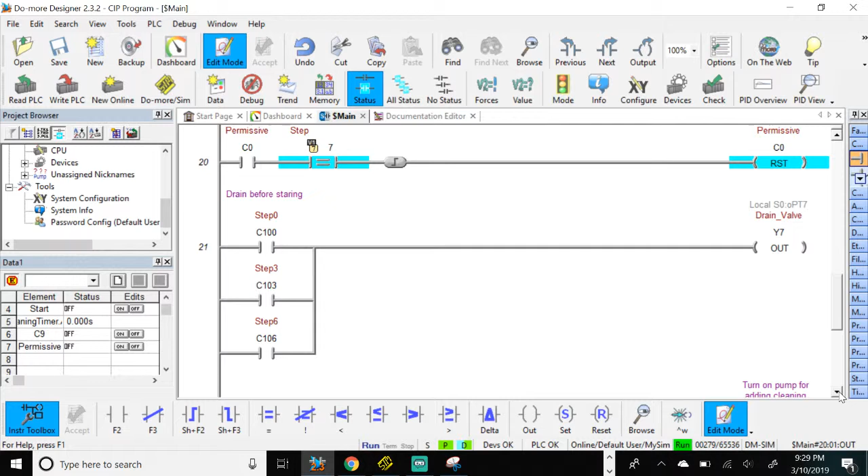So if you notice that your program gets stuck, like it doesn't want to move, it might be that it wants to go to 2 different steps or 2 different stages at the same time. You probably want to use this instruction. So right now, this is what I did on every output. I OR them together on every step, even for the lights. And even on one of the lights, I use an inequality, right? I'll leave that one to you. I think that's basically it.